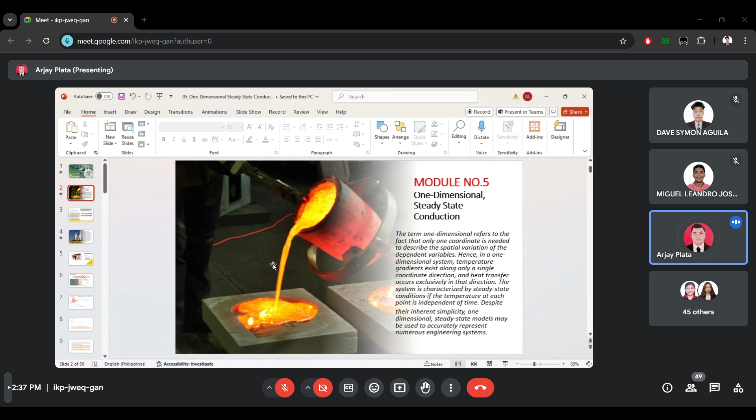Okay, so our objective for today is to determine the expressions for the temperature distribution and heat transfer rate in common planar, cylindrical, and spherical geometries. So we will study three geometries: planar, cylindrical, and spherical. Also, we will be introduced to the concept of thermal resistance, to apply heat transfer and thermal resistance concepts in problem solving.

Okay, so for such geometries, an additional objective is to introduce the concept of thermal resistance, to show how thermal circuits may be used to model heat flow, much as electrical circuits are used for current flow. So today you will be taught how to prepare a thermal circuit.

So first we will study heat conduction through the plane wall. As I said last week, we will have only one direction, so there's no x, z, and y coordinates all at once. Also, we won't have energy generated and energy stored, so heat conduction through the plane wall is equivalent to zero for those terms.

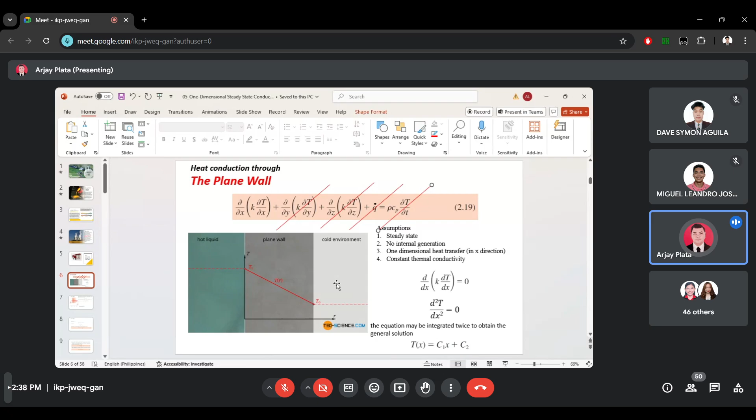So for one-dimensional conduction in a plane wall, temperature is a function of the x coordinate only, and heat is transferred exclusively in this direction. In this figure, as you can see, we have here a hot fluid, a plane wall, and a cold environment.

So for steady state conditions with no distributed source or sink of energy within the wall, the appropriate form of the heat equation applies. Integrating this twice, we will come up with this temperature distribution equation: T of x equals C1 times x plus C2.

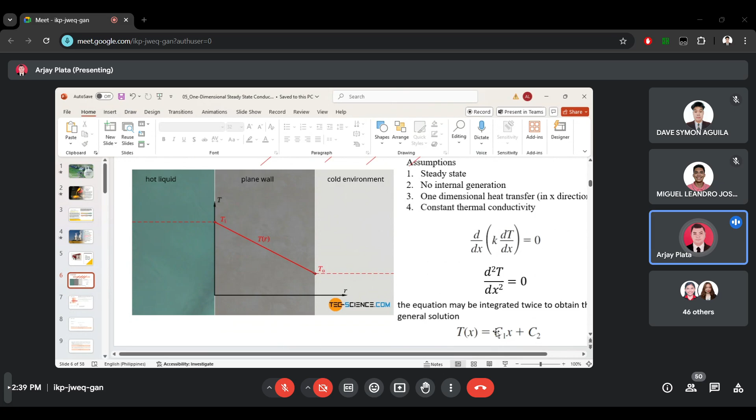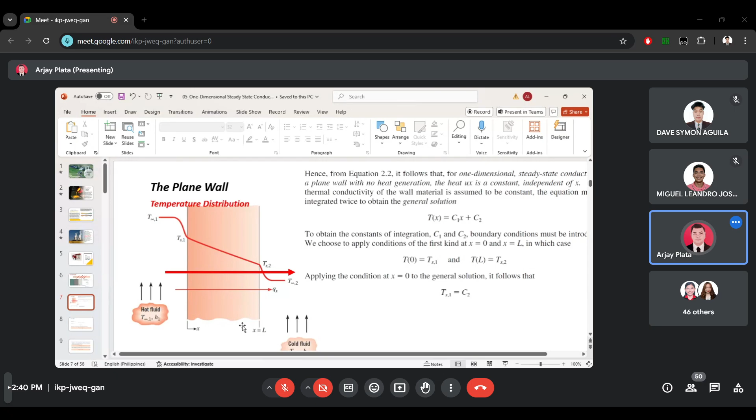So this is a plane wall. Imagine a plane wall with hot fluid on the left side and a cold fluid moving on the right side. So the temperature here is hot, then the heat will be transferred from the left part of the wall going to the right.

Okay, so at that point, we will be introduced to thermal resistance. For a special case of one-dimensional heat transfer with no internal generation and with constant properties, a very important concept is suggested by this figure, which is an equivalent thermal circuit.

So this is analogous to electrical resistance. As you have learned during your lower years, you studied an electrical engineering course subject where you were also taught about electrical resistance. It's the same logic as this thermal resistance.

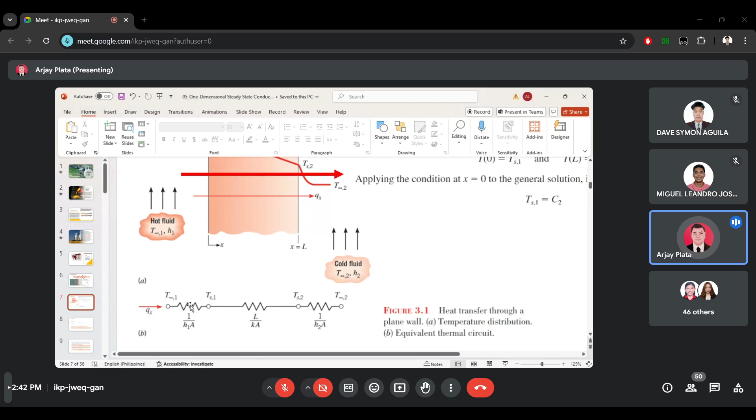Okay, so here we have convection at the left side of the wall. Because we have a hot fluid, it has temperatures T infinity 1 and TS1. So heat is transferred from this temperature, T infinity 1, going to TS1. As the heat is being transferred, there is also a thermal resistance occurring. So our formula is 1 over HA for the thermal resistance for convection, and its origin is Newton's law of cooling.

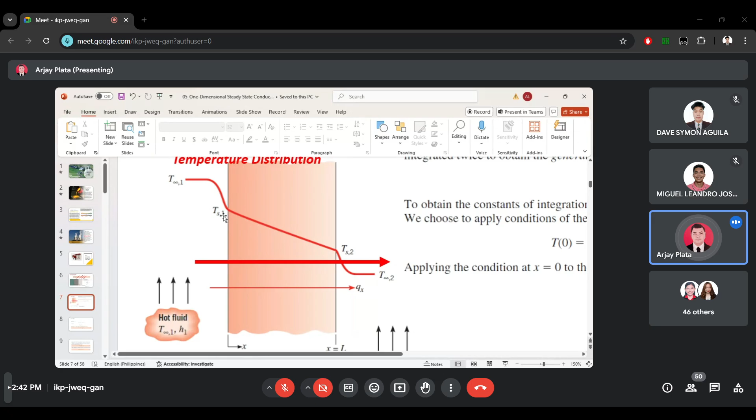So later I will discuss to you how this equation was derived. Okay, so from this T infinity 1 going to TS1, so we have the hot surface of the wall. So the temperature will be transferred from TS1 going to TS2. So that's why we have here TS1 and TS2. So as the heat is being transferred, there also exists a thermal resistance for conduction with formula L over Ka.

So yeah, there exists. And then from TS2 going to T infinity 2, so heat is being transferred to the cold fluid. So we have here TS2 going to T infinity 2, and we have a convection thermal resistance 1 over H2A. So you will be required to include this thermal resistance diagram in your solutions.

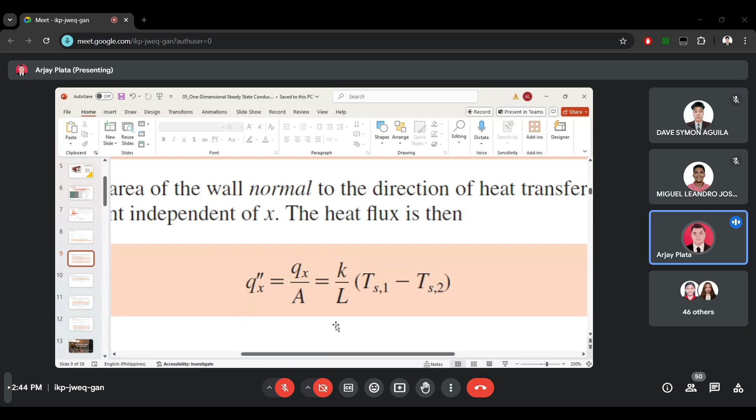Okay. Right. So here in this problem, this is the equation of heat transfer. So we have our heat flux. We have Qx over A is equivalent to K over L multiplied by the delta T. So our formula for thermal resistance for conduction is delta T over Qx, also equivalent to L over Ka. So how did it become equivalent to L over Ka?

Adonai Ernest Gabriel, are you here? Adonai Ernest Gabriel, are you here? Sir, yes po. Sorry po.

Okay, so how did it become L over Ka? So we have thermal resistance for conduction, and this is the formula: Ts1 minus Ts2 all over Qx equals L over Ka. No idea, Ernest? Wala, you have no idea. Sir, kababalik lang po kasi ng internet ko po. Nag-choppy po sa akin kanina. Okay, so Aguila Dave Symon.

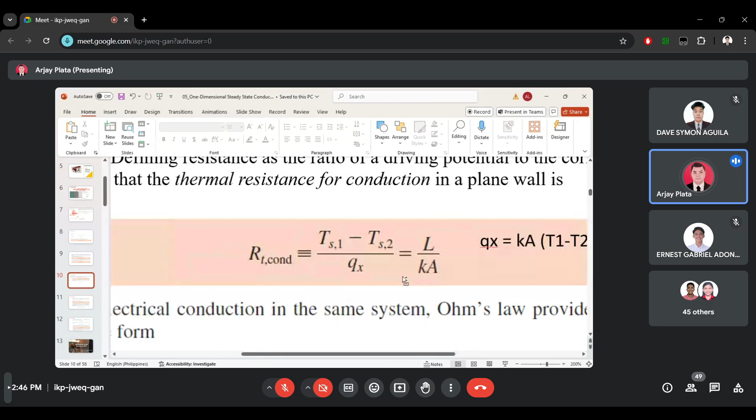So it is based on Fourier's law, which is the heat transfer rate is Qx equals Ka delta T over L. So this is the one that I told you last time. So that's why when you rearrange this, delta T over Qx equals L over Ka. So it came from this Fourier's law. So this is our formula for thermal resistance for conduction.

So where do we use this formula, this thermal resistance for conduction? We are using these for calculating the rate of heat transfer. Because we have Qx, you can calculate it by delta T over L over Ka. So this is for conduction, while for convection, we have the same concept but different formula. We have the thermal resistance as 1 over HA instead of L over Ka. This is for convection because it is based on Newton's law of cooling.

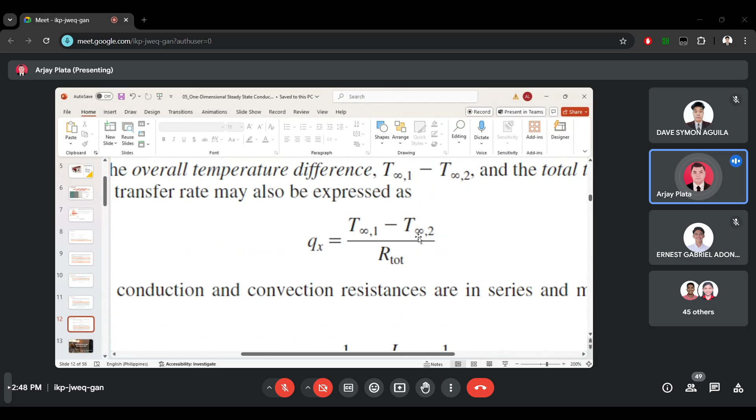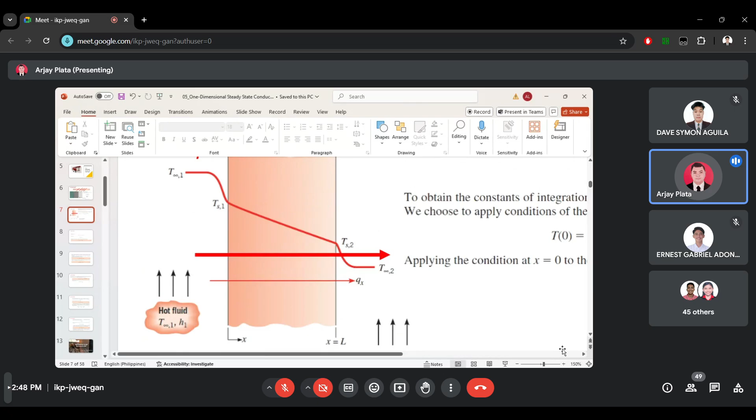Whenever you get the test paper, if it's a difficult problem in the exam, try to analyze it. You can draw, you can list the given, don't forget this formula. So Qx equals T infinity 1 minus T infinity 2 over R total. This is based on the figure earlier. So the overall delta T here is the highest, which is T infinity 1, minus the lowest, T infinity 2.

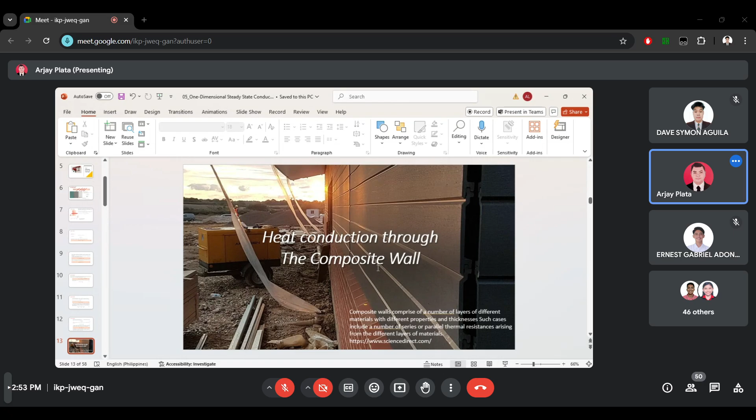So at first there is a concrete and then followed by a brick. This is for additional insulation to avoid cold or hot temperatures outside. So that's one of the examples of a composite wall. It is very common in some countries with extremely high or cold temperatures. When we say composite wall, it is made up of two or more different materials, so it has two or more different layers.

So as you can see here, the equivalent thermal circuits may also be used for complex systems such as composite walls. Such walls may involve any number of series and parallel thermal resistances due to layers of different materials. So consider the series composite wall in this figure. We have section A, B, and C, meaning three thermal resistances for the A, B, and C sections.

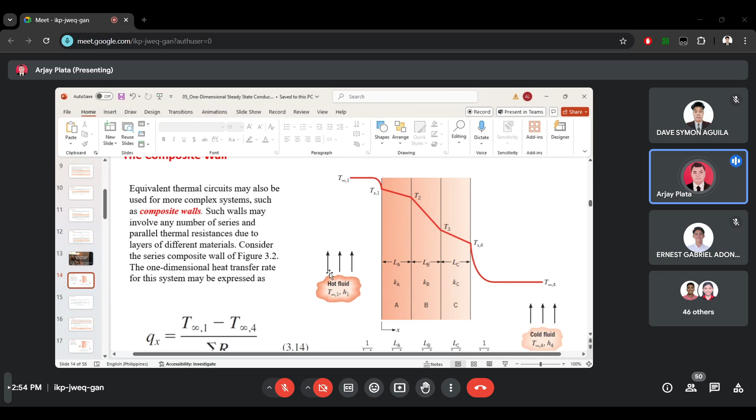So in here, we have your hot fluid, T infinity 1, going to TS1, so the heat is being transferred from the hot fluid going to the surface of the section A wall. And from this section A, heat is transferred from TS1 going to T2. So we have here a conduction thermal resistance L over KA.

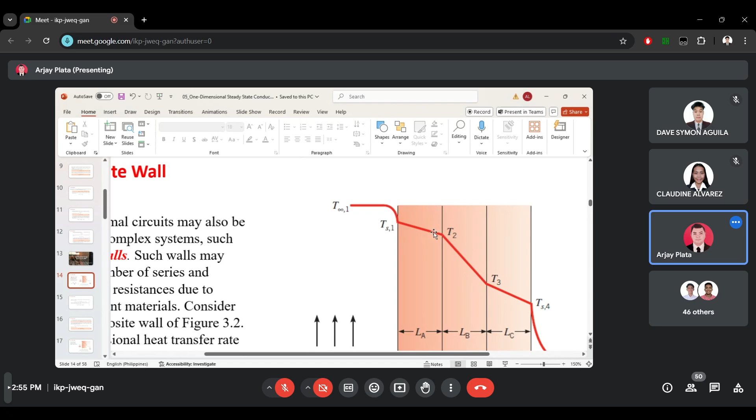Okay, so I will call on someone. Alvarez Claudine. Alvarez Claudine, are you here? Yes po, sir. Okay, so how about the heat transfer from T2 to T3? So this is what type of thermal resistance? What type of thermal resistance is involved when heat is being transferred from T2 to T3? So what type of thermal resistance? Based on this figure.

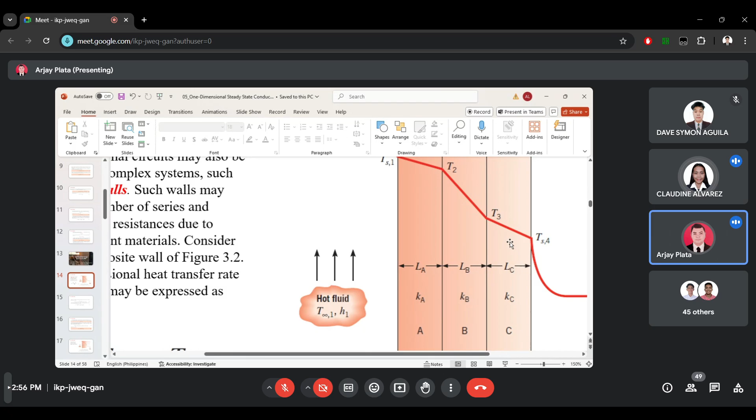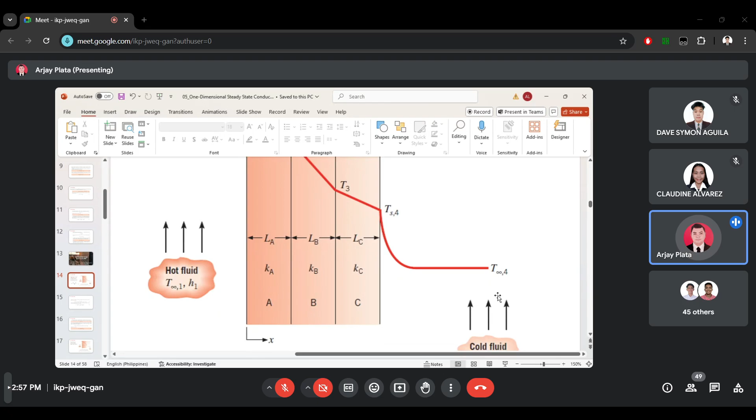So yeah, and for this one, TS4 going to T infinity 4. 1 over HRA4 po. That HRA is for radiation. This one is H4. So, because we have here a cold fluid, we have 1 over H4A. Okay, so this will be our thermal resistance circuit.

Okay, so in calculating the heat transfer for the thermal resistance circuit using the overall temperature difference: when we say overall temperature difference, it is the difference between the highest and lowest temperatures. So the highest here is T infinity 1 and the lowest is T infinity 4.

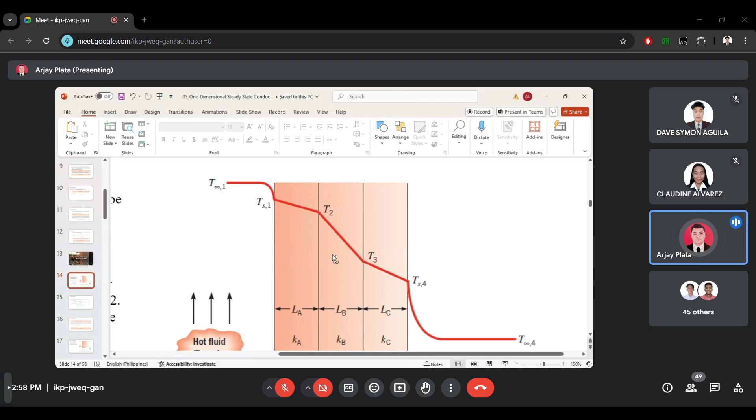Okay, so yeah, this is our temperature distribution. As you can see, this is our temperature graph. So when we are calculating the heat transfer using thermal resistance, we have to consider the overall temperature difference all over the total thermal resistances. So this is the overall temperature difference and this is the total thermal resistance. So you just have to add these thermal resistances. Okay.

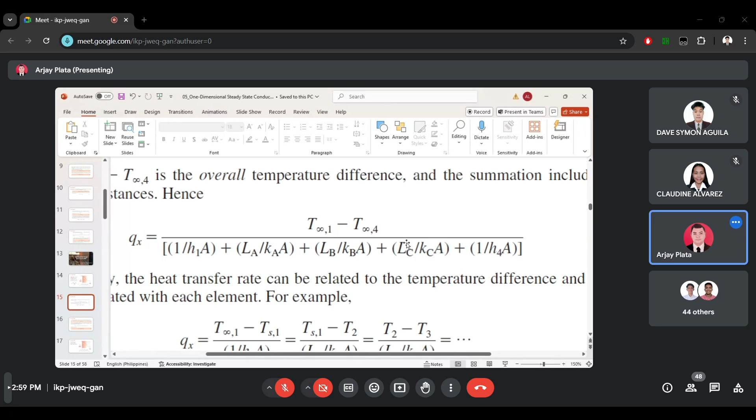Okay. So alternatively, heat transfer can be related to the temperature difference and resistance associated with each element. So we can also calculate the rate of heat transfer per element. For example, in convection, we consider T infinity 1 minus Ts1 all over the convection resistance. It is equivalent to the heat transfer by conduction, Ts1 minus T2 all over L over Ka. And equivalent also to conduction in the second layer, third layer, and so on. Okay.

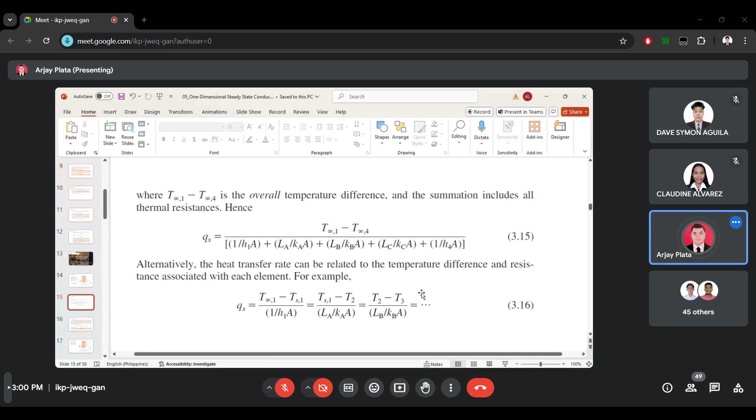So heat transfer can also be calculated using the overall heat transfer coefficient U. In the formula Q equals UA delta T, U is the overall heat transfer coefficient, A is the area and delta T is the change in temperature. To get the value of U, you have to use the value of R total. So our formula is U equals 1 over R total, equivalent to 1 over the total resistance.

1 over H1, L over Ka. This is for the figure that I have shown to you, so it depends on the figure. So we have 1 over H1 plus La over Ka plus Lb over Kb plus Lc over Kc plus 1 over H4.

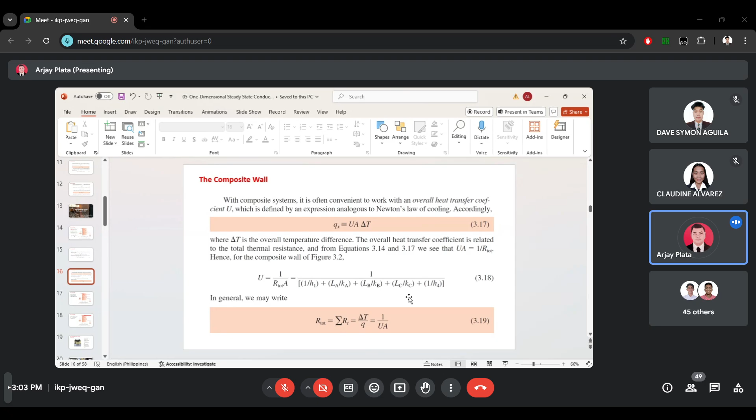Okay, I have a question here. For the first one, which thermal resistance in the figure is the highest? Let me start with Edsel Angeles. Are you here? Yes po, sir. So which thermal resistance do you think in the figure is the highest? Section B po. Why? Because based on the diagram po, it has the highest temperature difference, which might indicate that resistance occurred in that section.

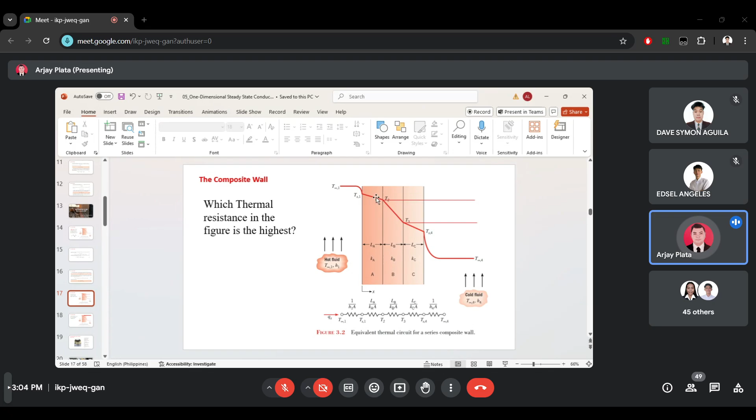Okay, so yeah, that's correct. So it's section B which has the highest thermal resistance. When we say thermal resistance, it resists the transfer of heat. So it is evident that the heat is being resisted in this diagram. As you can see, from T2 going to T3, there is a sudden drop in temperature because of the heat resistance.

Or thermal resistance. Probably this material is made up of wood, so that's why the heat is not being conducted efficiently. Unlike these two sections, A and C, there is a very small difference in terms of temperature, meaning it has a low thermal resistance because the heat is being transferred effectively.

Probably this is a metal. Same case with section C, where heat is being transferred from temperature T3 going to T4. So this is also probably a metal because, as you can see, the heat is being transferred. So minimum heat loss from T3 going to T4. Unlike T2 going to T3, there's a great heat loss, which means there is a thermal resistance,

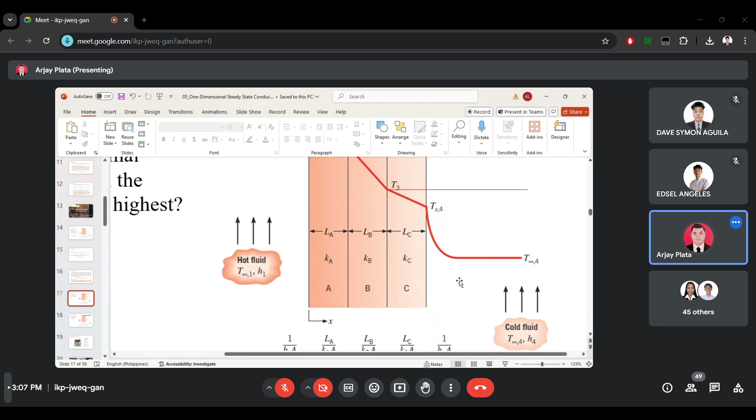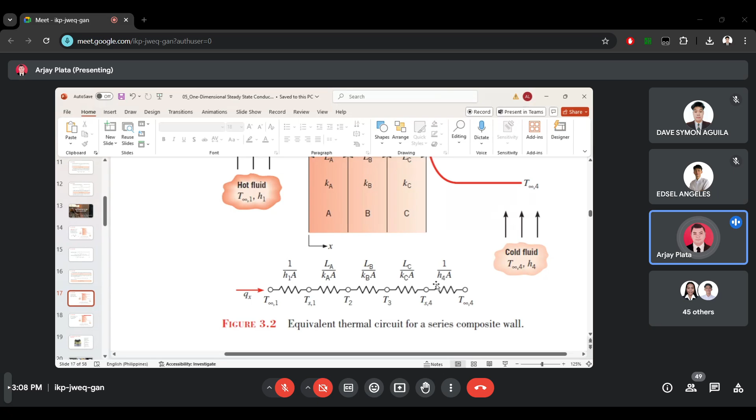Okay, so next, this is the equivalent thermal circuit for a series composite wall. This is the same as we have said earlier. The heat transfer here is the same as the heat transfer here and here. So it's constant heat transfer. Okay.

I have another question. Atienza Abnel Blair, are you here? Atienza? Hello po, sir. So my question is, which solid layer in the figure has the lowest thermal conductivity?

Wait lang po, sir. I think part B pa rin po. Why? Since it is the highest resistant po, it would mean least conductive din siya, since small lang yung heat transfer na nangyari sa section po. Yun lang po.

Okay, yeah, that's correct. So it is section B which has the lowest thermal conductivity because the heat is not conducted effectively. There is a large temperature drop, meaning it is probably made up of wood, which is a good insulator, unlike the two other sections.

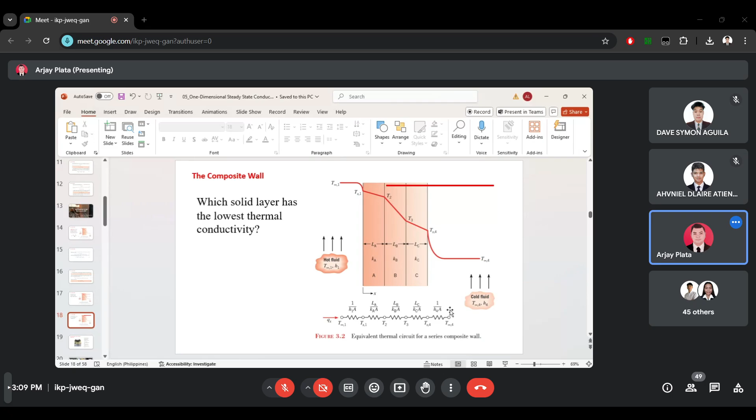When you go to the industry, you will find a pressure vessel. A pressure vessel is a vessel that has probably a process fluid inside. Sometimes the temperature inside is too large, so for safety, we provide insulations. This is an example of a composite wall wherein there is more than one layer.

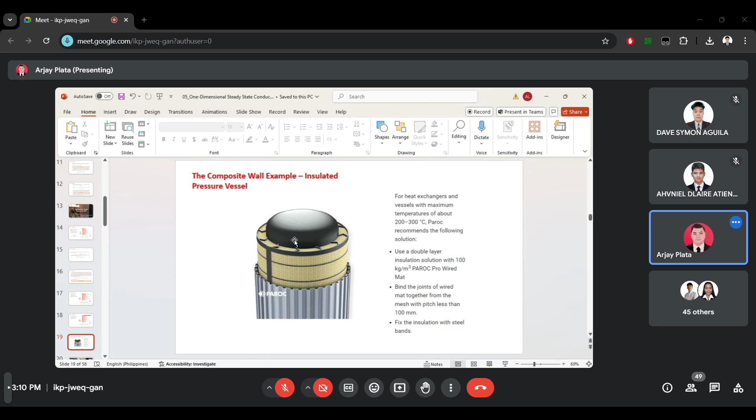Since the temperature of the vessel is too high, it is not safe if it is not covered by insulation. So it's a requirement of the industry standard to provide insulation on the heated surface. This one is an example: from the bare vessel, we have here an insulated vessel.

Okay, and after providing this insulation, we have here the cover. You have to cover the insulation to prevent it from being wet by rain or other fluids, so it has to be protected. This is an example of a composite wall, an insulated pressure vessel.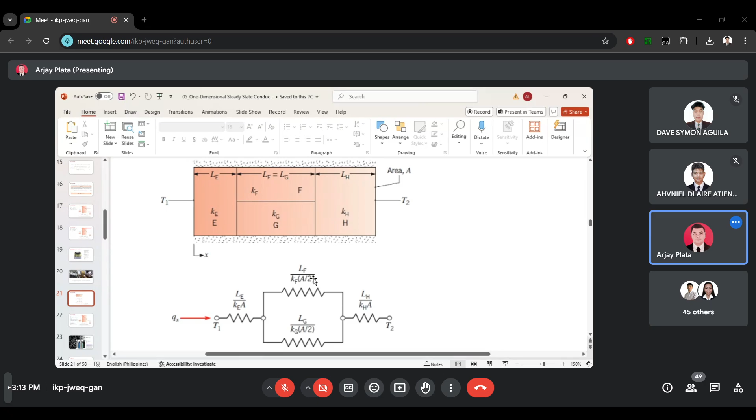Okay, so this is the composite wall, for example. We have different layers of material: layer E, F, G, H. The thermal resistance goes like this. We have series thermal resistance, for Ke, the thermal resistance for conduction. Then in parallel, thermal resistance for conduction, and we have to divide the area into two because it is divided into two.

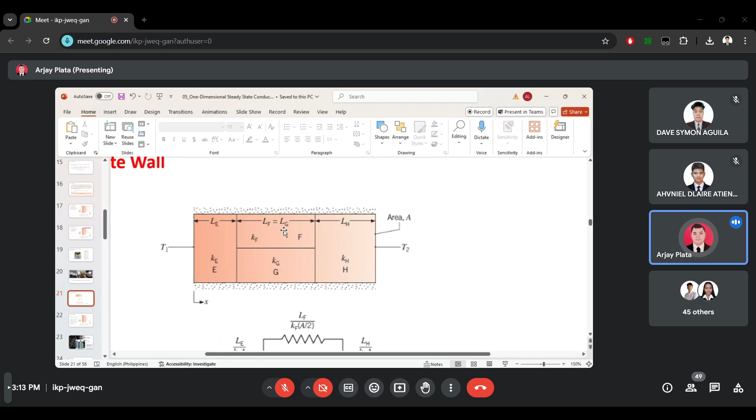And the last one is H, thermal resistance for conduction. In case there is a fluid on both sides, you have to consider the thermal resistance for fluid, or for convection. So this is series, parallel, series. It happens when this is divided into two sections.

Yeah, this one. So it's parallel and series at the same time. Okay. So when is it applicable? When is it applicable? So, composite wall.

So the thermal resistance concept is not applicable when there is a generation term in the circuit. So for example, there's energy generated. So meaning the heat transfer will not be steady state, because the heat flow will not be constant with respect to x. So you can no longer equate the heat flow or heat flux, although it could be applied to other parts of the circuit. So the system is not steady state because heat flow will not be constant with respect to x. So some heat will be accumulated by the solid along the way.

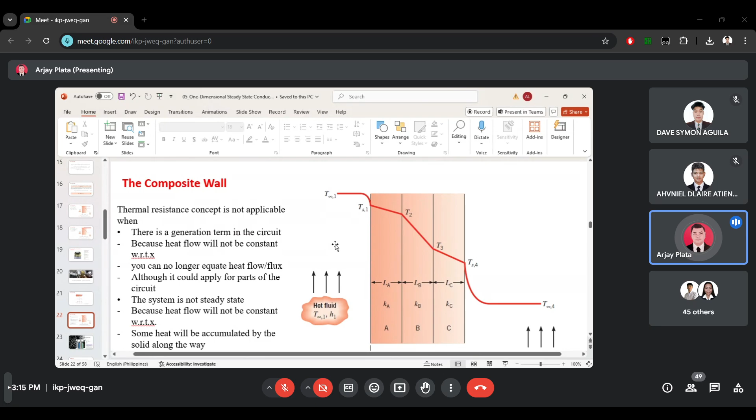Okay, so that's our composite wall. Next, we go to the cylinder. So we're already done with the plane wall, then the composite wall, then we will go to the cylinder.

Barola, Alvin, Anthony, are you here? Barola. Lobo, sir. Yes po.

Okay, so with regard to this figure, why do you think the aqua flask or the tumbler that is available in the market has the capacity to store liquid at a certain temperature? Let's say you put hot water inside. What makes this aqua flask prone from not being co-, how do you say this? If you put hot water in an ordinary container, the tendency is it transfers heat easily, so the water gets cold easily. So what do you think is the difference between this tumbler and an ordinary tumbler or ordinary container?

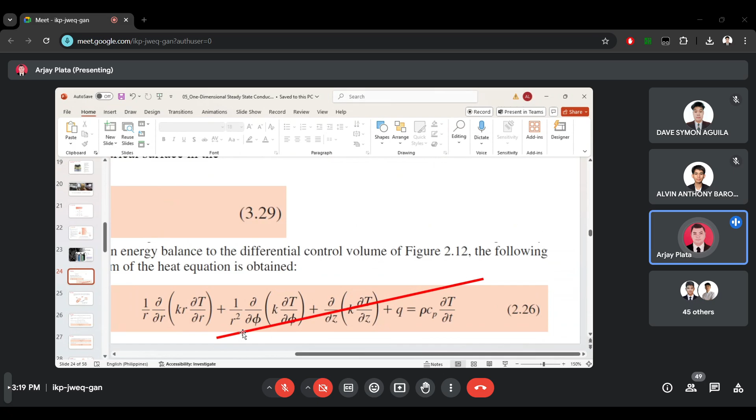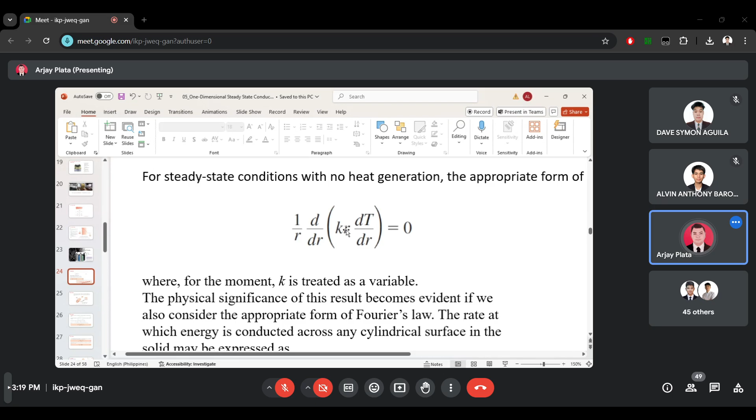So what will remain is this: d over dr of the quantity kr multiplied by dT over dr. Where, for the moment, k is treated as a variable. So the physical significance of this result becomes evident if we consider the appropriate forms of Fourier's law. The rate at which energy is conducted across any cylindrical surface in the solid may be expressed as this equation.

So yeah, this is just the same as the Fourier's law equation for conduction. The only difference is that it uses a different formula for the area. For cylindrical coordinates, we are using 2 pi r L as the area. So yeah, that's the only difference. It's just the same as the plane wall. Okay. So yeah.

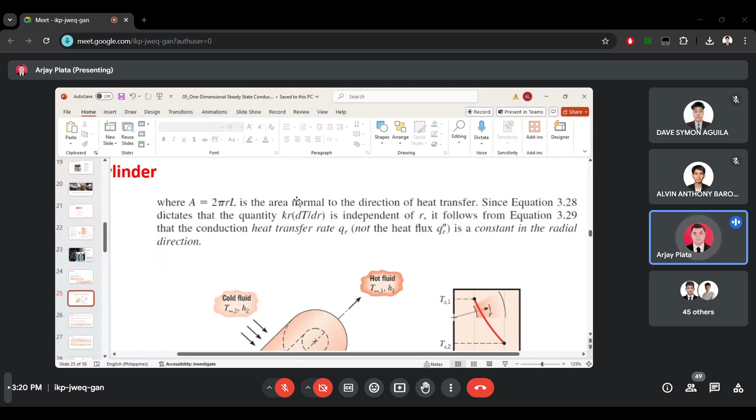So our area is 2 pi RL. This is the area normal to the direction of the heat transfer. So as you can see here on our screen, we have another cylinder, hollow cylinder with convective surface conditions.

So for example, there is a hot fluid, let's say steam, moving inside the pipe with a specified thickness.

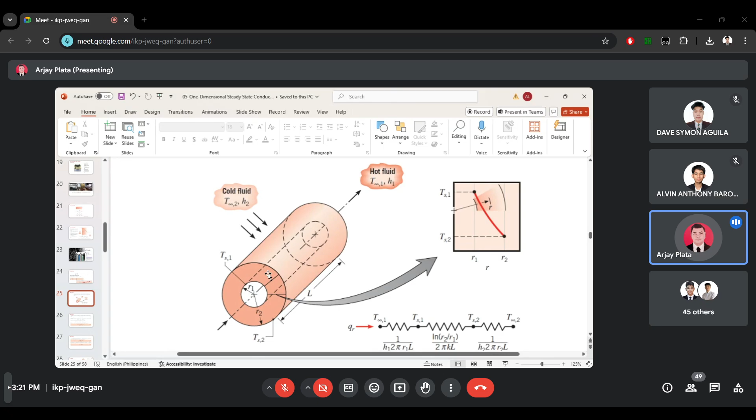from the steam going to the thickness of the pipe, and from the pipe going to the cold fluid.

So yeah, solid walls.

Now, John Jeremy, are you here? Yes John po, sir.

Jeremy, okay, so how many thermal resistances are there in the figure? Can you enumerate?

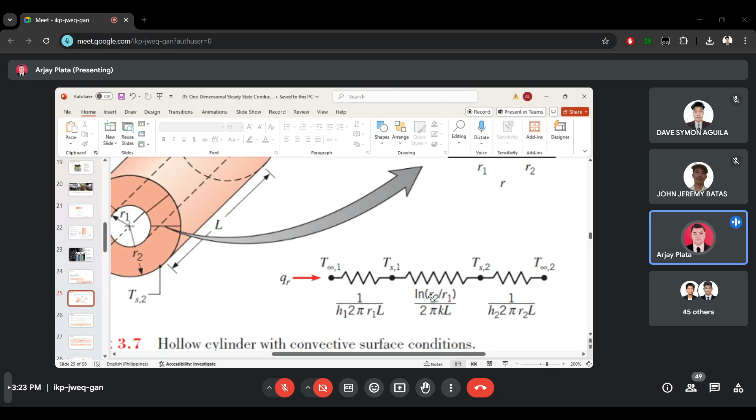TS1 transferring heat going to the outside of the pipe, which is TS2. So you have TS1, TS2.

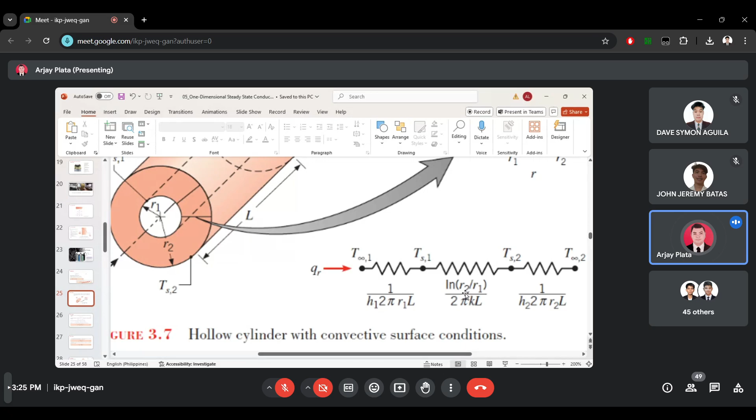Okay, so for conduction, heat transfer for cylindrical geometry.

And next, followed by heat will also transfer from this pipe going to

cold fluid moving outside. So we have here convection again, 1 over HA, where A is 2 pi RL.

Okay, so yeah, that's the three thermal resistances available.

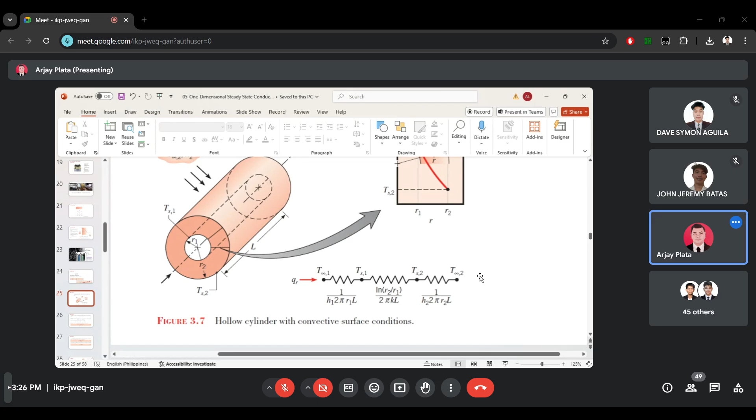Okay, yeah. So do you have any question with this thermal resistance?

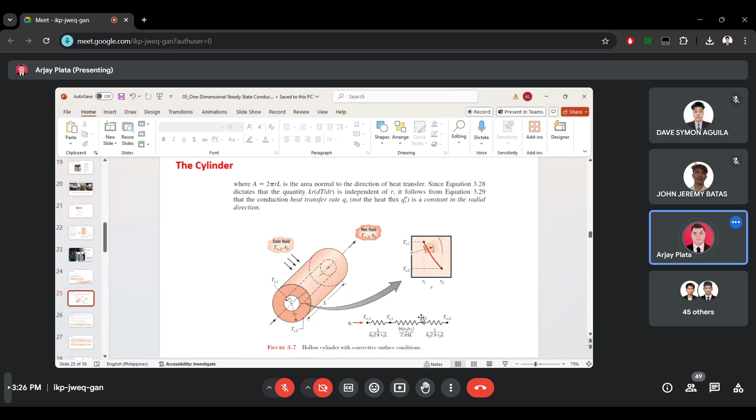This is the formula that I am referring to. So this is the formula for conduction thermal resistance for cylindrical coordinates.

So we have here ln of R2 over R1, over 2 pi LK.

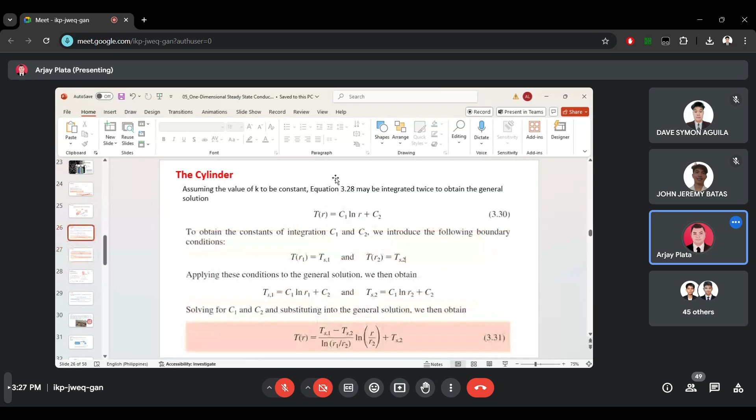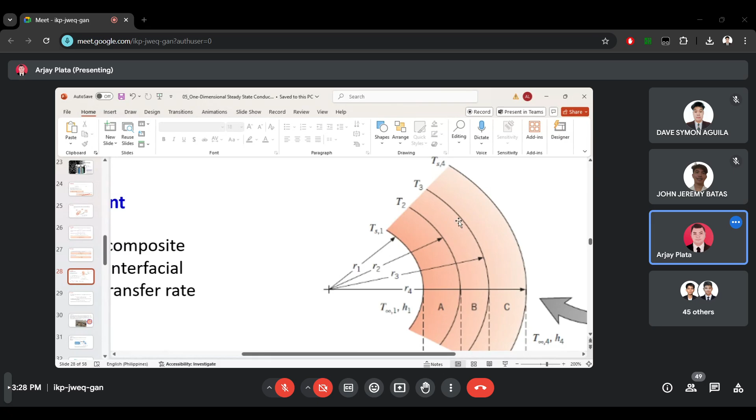So in some cases, there are some pipes specified as pipe. Let's specify it as pipe. There are some pipes composed of three materials, the one I showed you earlier. I think it's a good example. This one is composed of three layers.

So what about these three layers? What will be the thermal resistances? We have here, for example, a fluid inside the pipe or the vessel. We have three layers of materials and also a fluid flowing on the outside of the vessel. So how many are the thermal resistances here?

So I would like to call on Bederico Alyanna. Are you here, Bederico Alyanna? Yes po. How many thermal resistances are there in the figure?

Wait lang po. Um... Apat po. No, it's not four. Five. Uh, five po.

So why did you say it's 5? What are those? Wait po, hindi ko masyado makita. T infinity, T infinity 1, T2, T3. Ano po to? Wait lang po, hindi ko po masyado makita. T infinity 4 po, at saka...

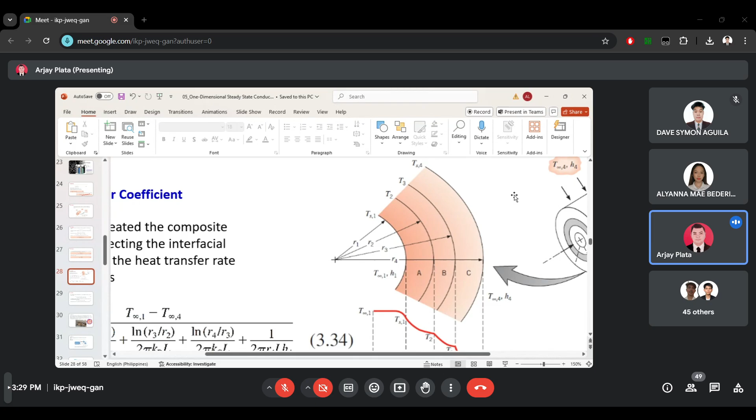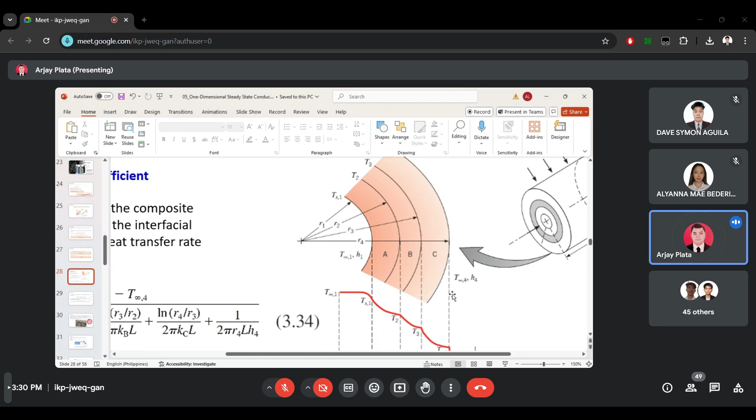So you should have mentioned: thermal resistance for conduction, for convection, and then followed by three thermal resistances for conduction and one resistance for convection. So it's five thermal resistances total.

We are going to start with convection. So we have 1 over HA.

And for conduction, from TS1 going to T2: ln of R2 over R1, where R2 is the outside radius, and R1 is the inside radius, over 2 pi K L.

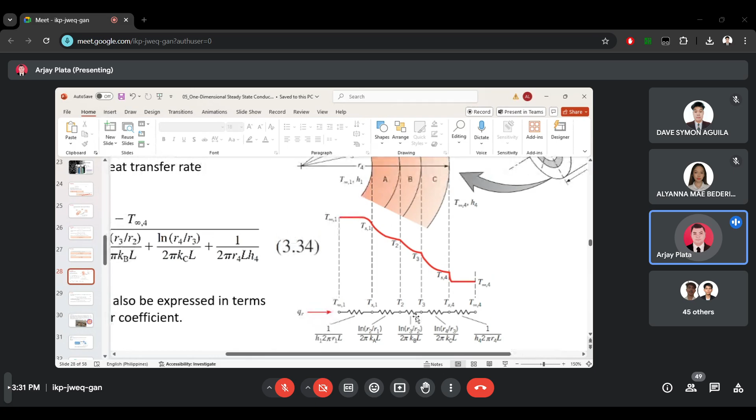For this one, for the third one, for the third layer, we have section B, which transfers heat from T2 to T3. So we have ln of R3 over R2. R3 is the outside radius, and R2 is the inside radius.

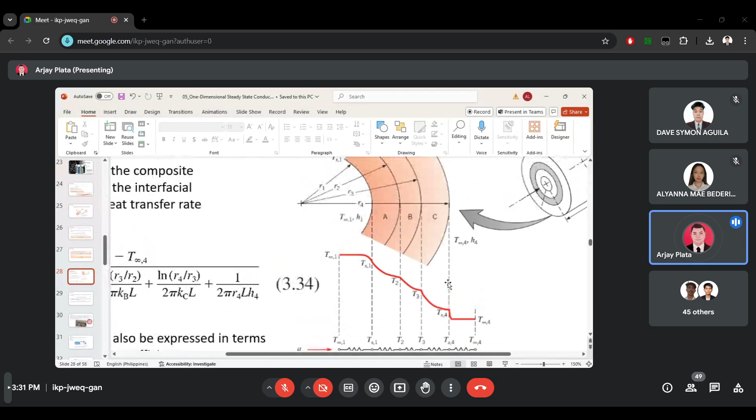So the thermal resistance here for section C is ln of R4 over R3, over 2 pi K L. R4 is the outside radius, and R3 is the inside radius.

And finally, we have the convection heat transfer. So we have convection thermal resistance.

So that is 1 over HA. This is the temperature distribution for a composite cylindrical wall.

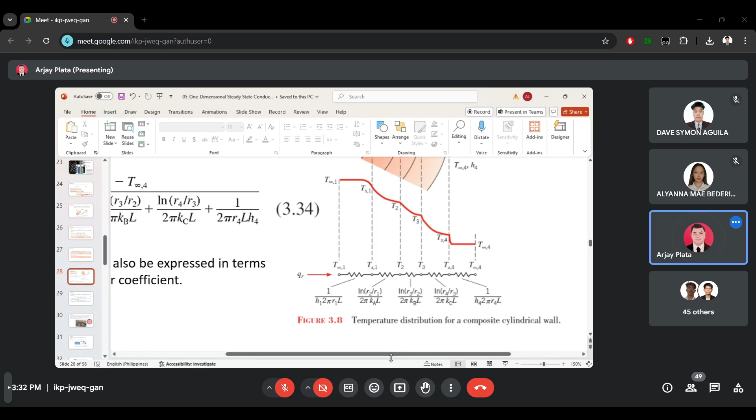So the overall temperature difference is the difference between the highest and the lowest temperature. In this case, the highest temperature is T infinity 1 and the lowest temperature is T infinity 4.

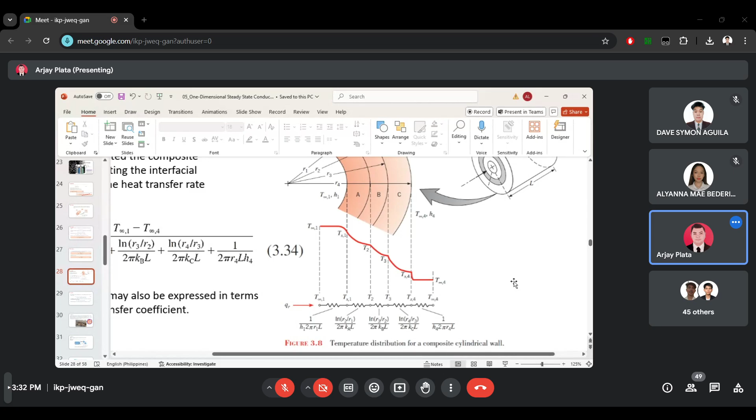In calculating the overall heat transfer, we have to identify the overall temperature difference over the total thermal resistances. So delta T over R total. R total is the summation of all the thermal resistances.

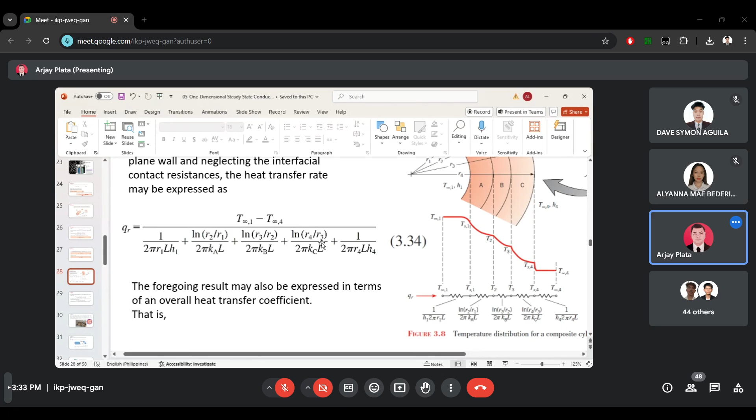So the foregoing equation may also be expressed in terms of an overall heat transfer coefficient, which is U. U is the overall heat transfer coefficient.

So U is typically defined in terms of the inside area, A equals 2 pi R L, so this equation will be derived.

So instead of this equation, your Q equals T infinity 1 minus T infinity 4 over R total. We can also use U A delta T.

Then U is 1 over R total, which is 1 over HA,

So you can use this formula in terms of delta T over R total, or you can also use U A delta T. If you want, you can simplify it. So you can use both formulas.

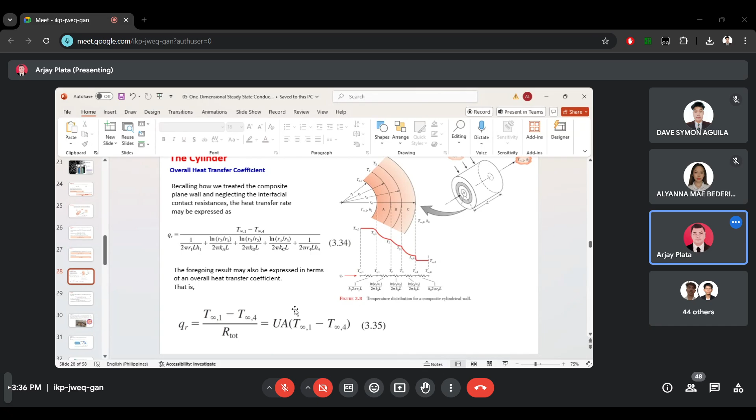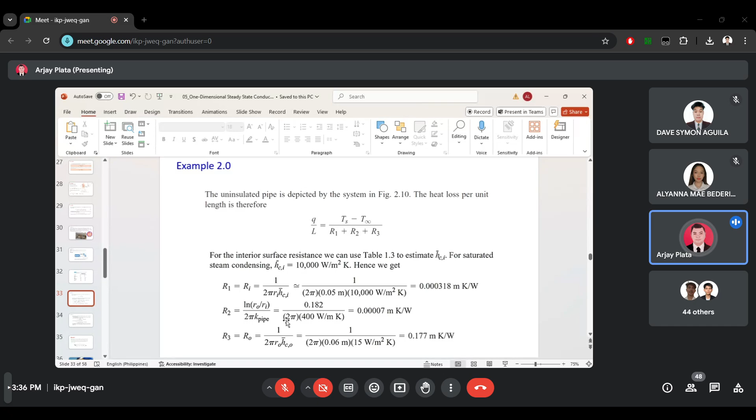So we have some examples here for the cylindrical. We will discuss it tomorrow. So we'll go to the spherical coordinates. So do you have any question with plane, cylindrical, and composite wall?

Did you understand our lesson for today? It's more on thermal resistances. So if you don't have any question, we'll proceed with the sphere.

So yeah, same as the cylindrical and plane geometry. So we have a spherical geometry where the formula is the same, Fourier's law, which is negative Ka dt over dr. The only difference is that the area is spherical, so we have 4 pi r squared as the area, giving negative K times 4 pi r squared dt over dr.

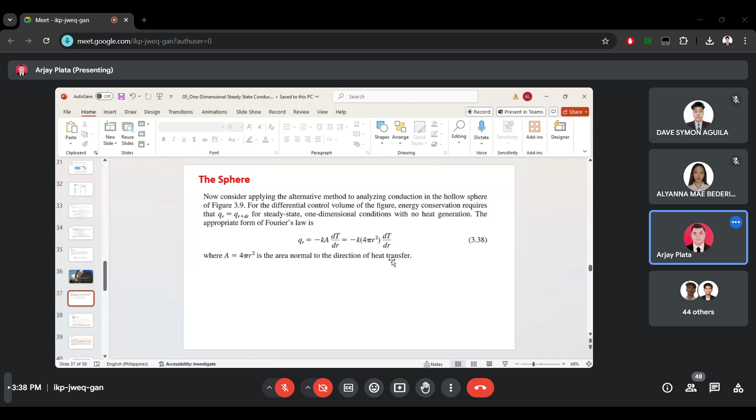So acknowledging that Q is a constant independent of R, equation 3.38 may be expressed in the integral form of QR over 4 pi multiplied by the integral of dr over r squared, with the limits TS1 to TS2, multiplied by K, the quantity T times dt.

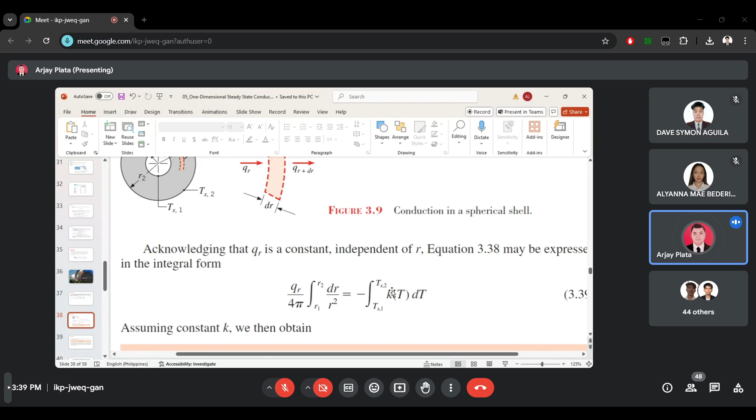So integrating this, assuming k is constant, we can obtain this equation of heat transfer at spherical coordinates: 4 pi k multiplied by Ts1 minus Ts2, all over 1 over R1 minus 1 over R2.

Sino nakapag-withdraw na dyan sa ATM? Nagana na ba yun?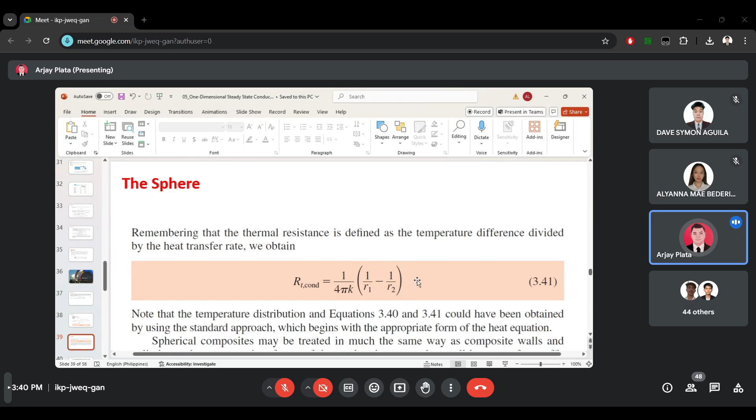So yeah, remembering that thermal resistance is defined as the temperature difference divided by the heat rate, we obtain the thermal resistance for spherical: for conduction, we have 1 over 4 pi k multiplied by 1 over R1 minus 1 over R2. So don't forget this formula, okay?

Yeah, so we have here an example. We have many examples here for the spherical.

Okay, so I prepared here a summary of the one-dimensional conduction through the plane wall, cylindrical wall, and spherical wall. So yeah, you can refer to this. I already provided the formula here.

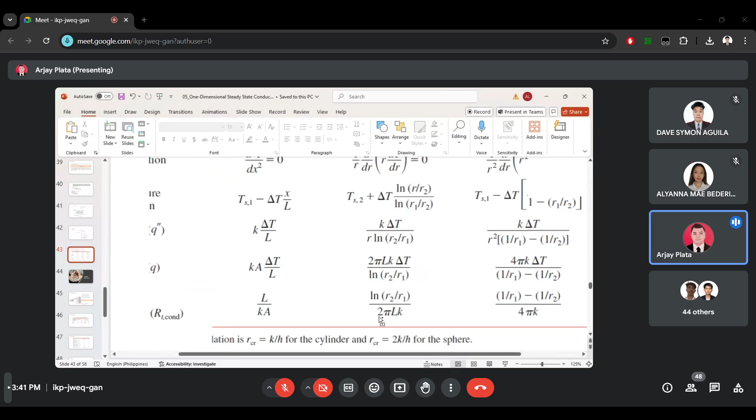So for example, we have the heat equation for the plane wall: the temperature distribution, the heat flux, the heat rate, and thermal resistance L over kA. For the cylindrical wall, this is our heat equation, temperature distribution, heat flux, heat rate, and thermal resistance.

For spherical wall, we have here this equation, the temperature distribution, heat flux, heat rate, and thermal resistance. So yeah, that's it, that's the summary of our discussion. Any question?

Okay, so our next topic is contact resistance. We'll continue this tomorrow, the contact resistance topic.

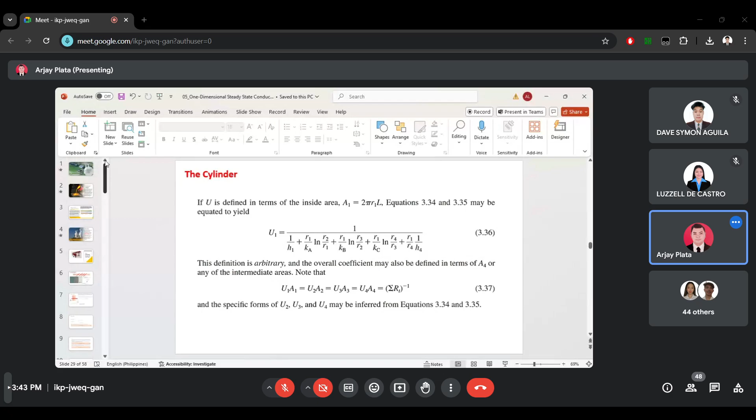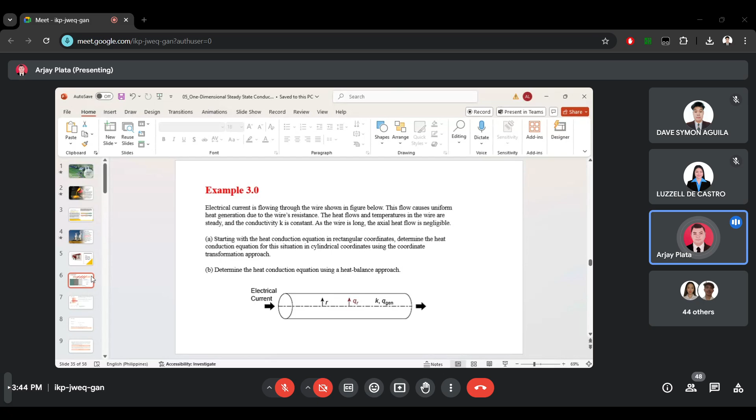Okay, so we still have time. So we will continue our discussion with some examples.